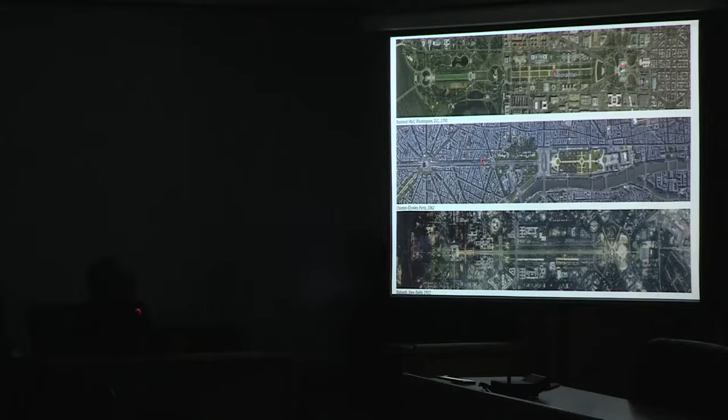Here are well-known images: that's the Washington Mall, that's the Capitol, Lincoln Memorial at the other end. Here you have the Louvre, and Arc de Triomphe at this end. At the same scale, you have India Gate here and Rashtrapati Bhavan. They were really looking at this when they did this.

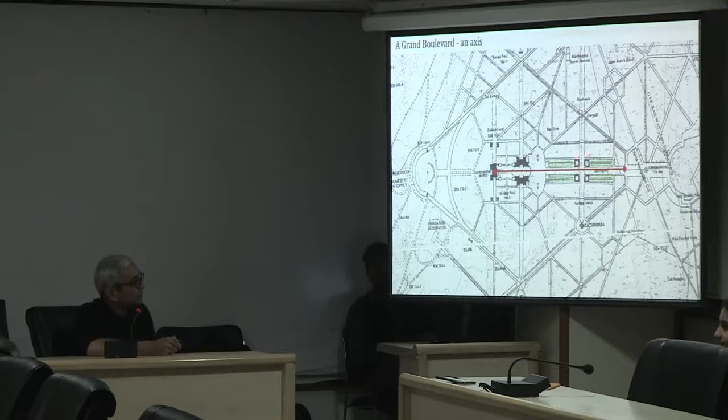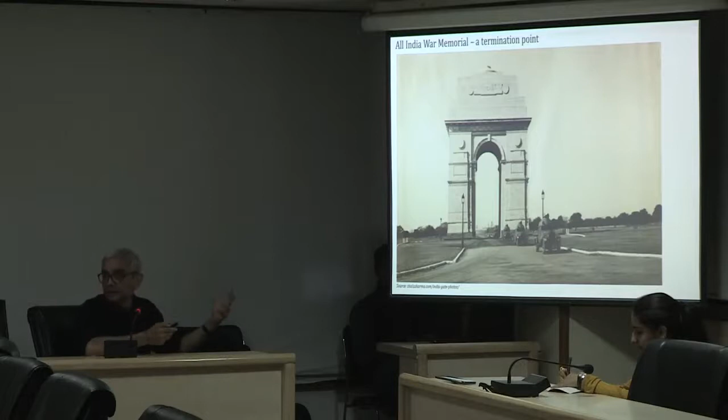You have a grand avenue of trees that sets up an axis, with a focal point at the other end - Viceroy's house, North and South Block. That's the grand axis in the middle. In the flanks, the supporting flanks, there was an idea of building administrative buildings on both sides, but nothing got settled finally and these didn't get built. At the termination of this axis, you had India Gate and the canopy. So that's your basic architectural frame.

Ever since, it has been a sort of beloved icon for us. Viceroy's house or Government House became Rashtrapati Bhavan. The statue of George V was removed from the canopy. Council House became Parliament - this was never designed to be. The North and South blocks had the most important ministries housed there. Now, the post-independence management of the Central Vista, unfortunately, was not as good as it could have been. The whole estate management was not informed by an inspiring and comprehensive architectural vision of any sort.

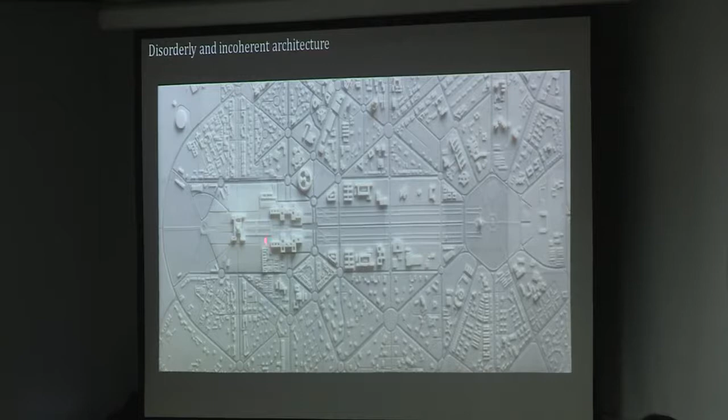The Central Vista today, I think just even the vision of it says that it's a bit disorderly - the development that came up afterwards. Of course, this is spectacular still, but this is rather disordered, incoherent. The architecture there has disparate buildings, different languages, quite incoherent here.

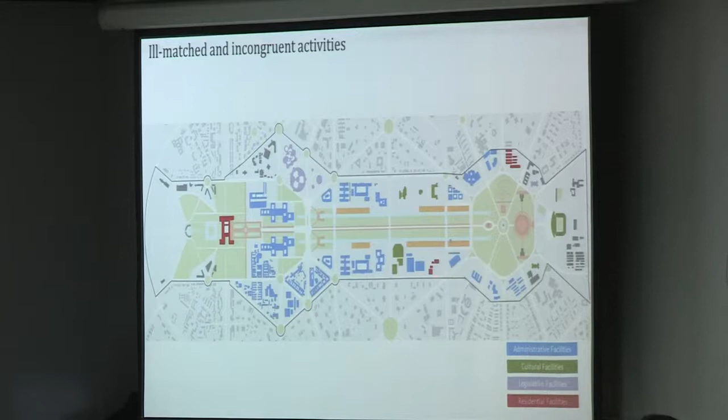The uses this place is put to - you have a lot of administrative facilities. It's a hodgepodge of uses: administrative, cultural, legislative, residential facilities, all sorts of things without some sort of order in this place.

What was meant to have all the offices of government actually has only half the ministries here. The rest are scattered all across Delhi. So you have 22 ministries scattered, or half are scattered outside. The powerful ones are here, but a lot of the others are elsewhere.

Many of the plots have rather informal development. Those old barracks have now become established offices, and there's a large amount of land - I mean, that's 20 acres, for example, a ground floor structure. Inside tall walls, but inside it's all informal and rather disordered, and a very, very poor use of land.

Even the earlier one, if you look at the buildings that were built, the footprint is small. The outside is a sea of parking. You still can't get parking here, and it's very difficult to add any new facilities. The buildings are laid out in a way that's difficult to add to.

If you look inside, many of you have been inside these offices - they are stressed, outdated, inadequate buildings, really difficult to put in new infrastructure. There used to be a way of moving through these buildings, but because of security reasons, that movement is now also cut down.

Actually, the Central Vista Avenue, as distinct from the whole Central Vista, this avenue also has been encroached upon by infrastructure and parking facilities. So at Nirman Bhavan, you go, there's a fence, there's a hole in the fence. You go through it, there's another fence behind, and there's a parking lot at the back, which is really bang on the avenue itself. So there's a bit of encroachment here also.

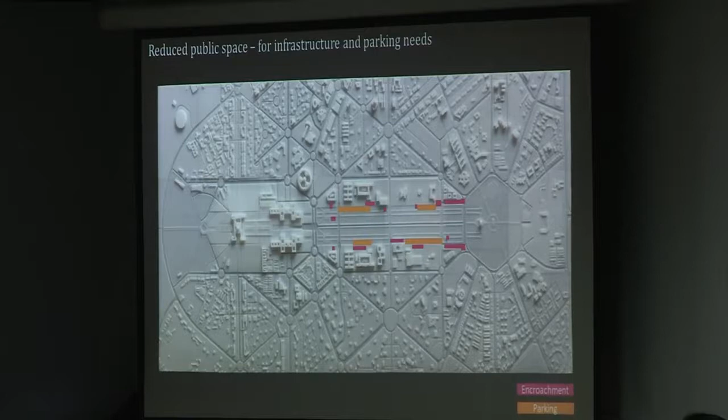The landscape is lackluster. National events take a long time to build up the whole thing and then dismantle it - it's kind of clumsy, the arrangements. It's a great civic garden for Delhi people, and it's well used, well loved, but not that comfortable to use, as it's quite clear. There's no toilets, for example.

Parking is a problem, etc. Pedestrians don't have a good time. Tourists also are drawn to the place - this is a beloved icon of India, but it's really not the best place you can be.

Nothing like inspiring capital complexes the world over. If you spend a day on the Washington Mall, you can spend it in comfort. It's a memorable experience, something that helps build the whole story of the United States, and it's a fantastic achievement there. Canberra likewise has a terrific space also, and nothing like a walk down the Champs-Élysées.

Many people, many in this room, have demanded that this Central Vista should be better administered, better developed, better maintained, and that its heritage should be protected. INTACH has said it, ISOLA has said it, IUDI has said it, individuals have done it. There have been studies done, many by people in this room, saying this has to be better managed. And nothing has been done up to now.

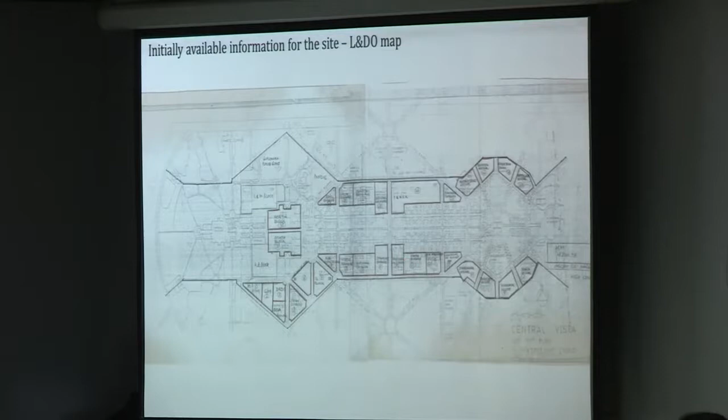And the information we got was this plotting plan, which wasn't very much used. There are these history books - there are lots of terrific books also published by Rashtrapati Bhavan, etc. And there are these historical maps which one could use.

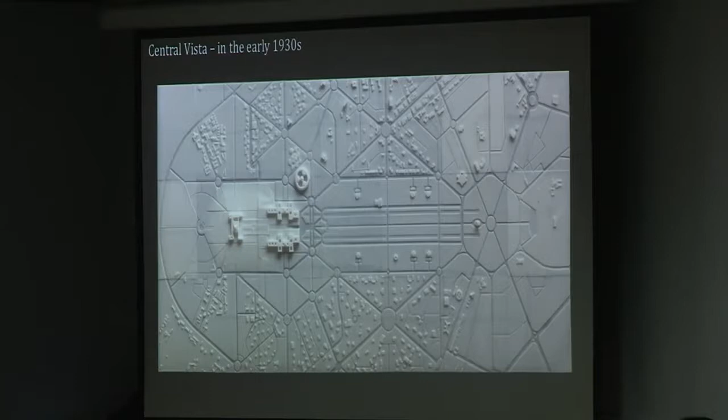And then thank God for Google, because nowadays from Google the amount of information you can actually download - frame drawings, levels, models of buildings - is immense. So we do that a lot these days, and we were able to build up this 3D printed model out of basically Google information. It's pretty accurate, and that's what we did.

We were able to build up that sort of model based on information from the Google image of that place, and develop a sketch which looked like this at that point. That's the animation many of you might have seen - that was the sketch that was there.

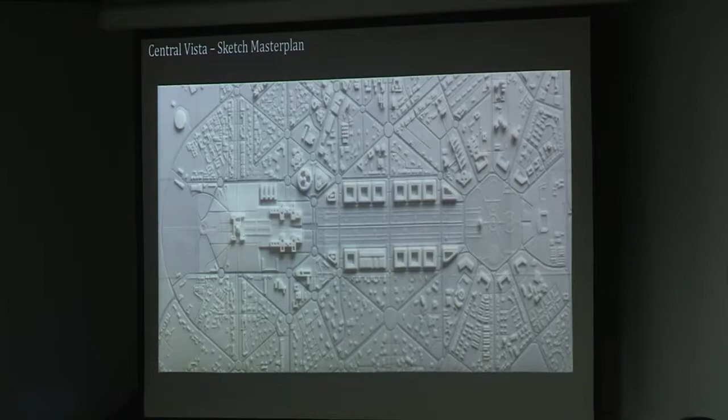Now, over the last three months, after October, the master plan has evolved considerably. As you all know, design is not a process of coming up with one idea. You come up with an idea and hope that it survives the evolution. Sometimes you have to throw out the original idea and start from scratch.

I think we didn't have to do that, but if you look at the different dates - 24th October - things start moving around as we start talking with people within government, and it keeps going. 24th December, 4th of January, and it will continue to evolve. Not in big ways now, but in smaller ways, it continues to evolve. Later on I can discuss some of the things that have happened as we've found out more information about this place, as we see more opportunities and more problems.

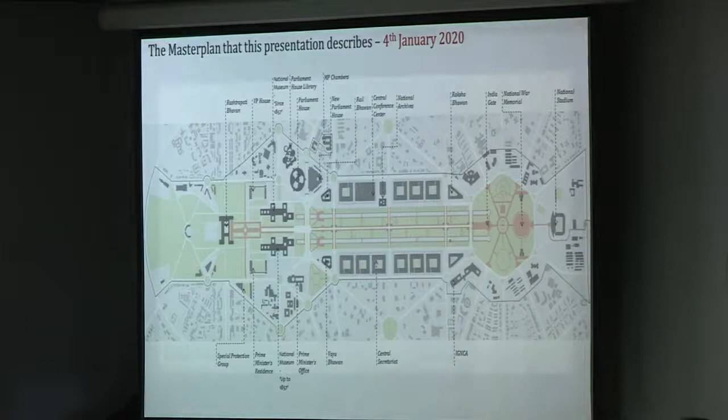So here's the 4th January plan that I'm going to talk about, and it's evolved even since then in minor ways, not huge ways. So what is this project about? It has multiple objectives - it's not one objective, it has multiple objectives.

Let me start with the first one, which is modernizing Parliament's facilities. Now you look at Parliament House - we first had to understand the existing facilities. Our original schemes said very little about what can be done.

So here's Parliament. We started with the historical drawings. We all know that Baker actually intended to make a building like this, but Lutyens almost forced him to make the round building, which we now all love and like.

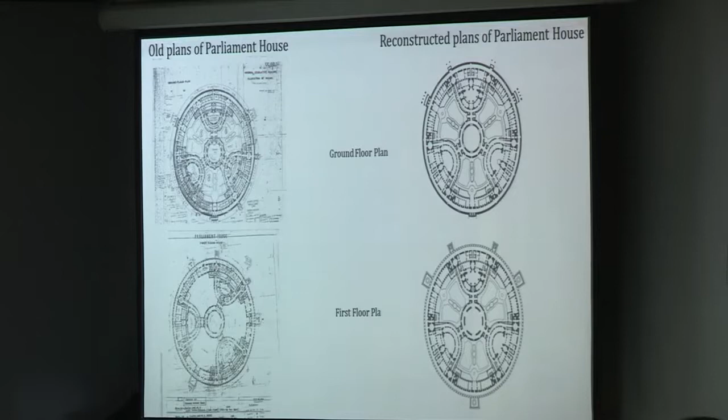And the drawings of this building, as you can imagine, are in very poor shape. They are being redrawn so that we can start using them. Elevations are the old ones like this - there are no computerized drawings or a nice, perfect portfolio available. That's developed in our office, drawn up just to appreciate and understand the architecture better. You know that we draw things to learn about them.

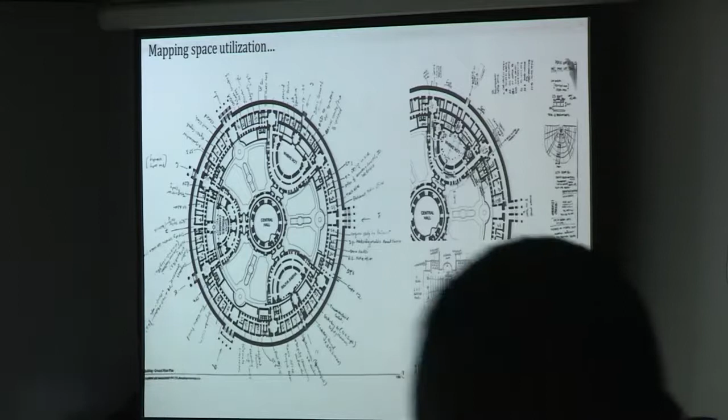We also listed all the space utilization. There is no modern estate management plan that tells us who sits where, and it's a complicated building. What are the adjacencies like? Who sits next to whom? What are the movement routes? What are the circulation routes in this building? These are very elaborate and very complicated requirements. Mind you, this building wasn't designed to be Parliament.

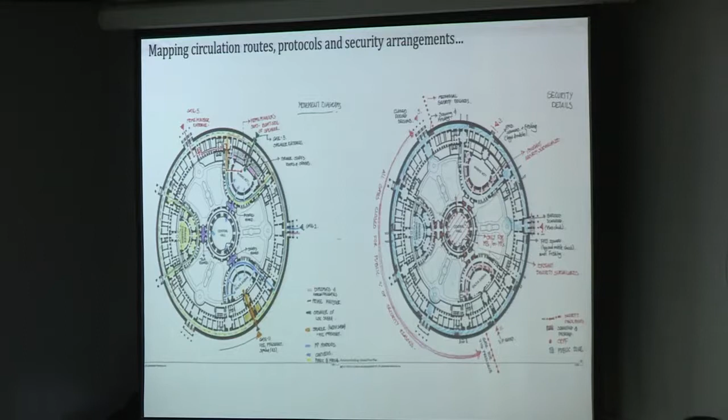Everybody has adapted to it, but now is wedded to the ways in which it is being used as the real way to organize Parliament. In any case, we need to know this as we go ahead.

We've measured the furniture because that's the key thing. You sit here and you debate. All the furniture here, different ways of arranging. What are the different facilities in this place? What are the additions and alterations to this building? There used to be natural light windows at one stage, which have been blocked, and these harsh lights have been put up instead.

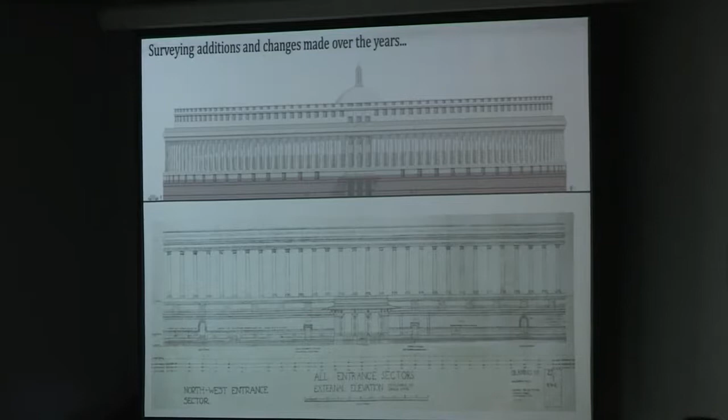If you look at the Lok Sabha Hall, these are the columns here, behind which used to be a corridor, but the expansion needs in the 50s meant the seats have been built right up to the edge. You can see in the plan, the hall is jam-packed, 552 seats. If you want to add a single seat more, it's not possible. Keep that in mind, because that's the operative reason why we need a new hall, one way or the other.

The central hall is a place where twice a year the joint session of Parliament meets, but it too doesn't have enough space, so all the aisles have chairs put in, and it's a fire hazard, a big risk. When Parliament expands, there definitely will be no seat for both chambers to meet together.

This hall is also used as a lounge, because there is nothing called a lounge there. So it becomes a place where they have chai, coffee. There's a chai coffee setup just in this corridor as you enter, and you find this is a place where ex-parliamentarians hang out, and that's where they meet everybody and talk. Very important business happens in these deliberations that our country functions on, but nonetheless it happens in a hall with furniture that's not meant to be a lounge.

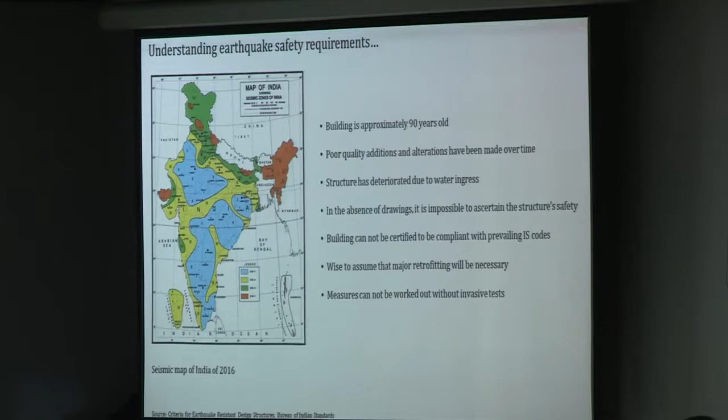So, in conclusion, it's a great symbol of our vibrant democracy, but if we want to expand seats—and they need to go up to 900 from 552, not 1 or 2 or 10 or 20 or 30, the projections are 900, I'll explain why—infrastructure modernization has to be done, and if structural safety concerns are there, we have to create a new facility with a larger hall, basically. The larger hall is the operative thing. Then the old building can be retrofitted, and we've come to the conclusion that the two buildings can work together, not as separate buildings, but some of the old facilities continue to remain in use. So perhaps the ensemble together can work, and that becomes the parliament rather than a new parliament and an old one. It's just an extension, and the two work together.

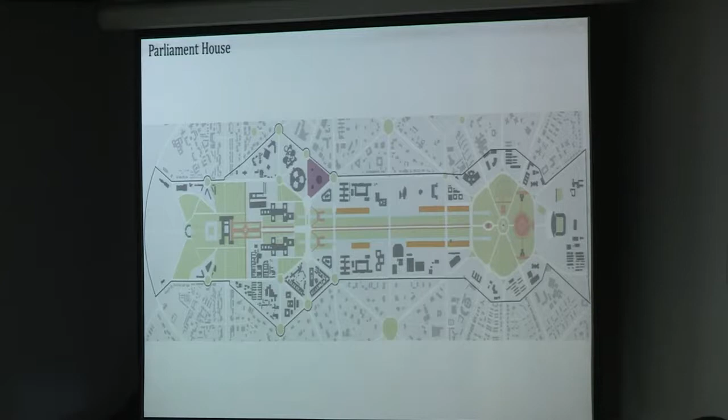It's designated legally as a garden plot, but there's nothing garden about it in reality at this point in time. This is where a new facility can be put up, and this triangular building is what we are developing the design for. So the architecture of this facility is also in progress.

It's a complex building. Security, Rajya Sabha, Lok Sabha, the Ministry of Parliamentary Affairs, all of them have offices there. The catering, the cleaning, there's a whole host of things. You can imagine what it's like. So the plans here are daily evolving as we have meetings with the staff and figure out how to get this going.

Of course, the parliament will continue to be in this diamond. Presently, you enter from here and here, and now there will be perhaps one more entry from this point, and the two would work together. I'll go fast over this.

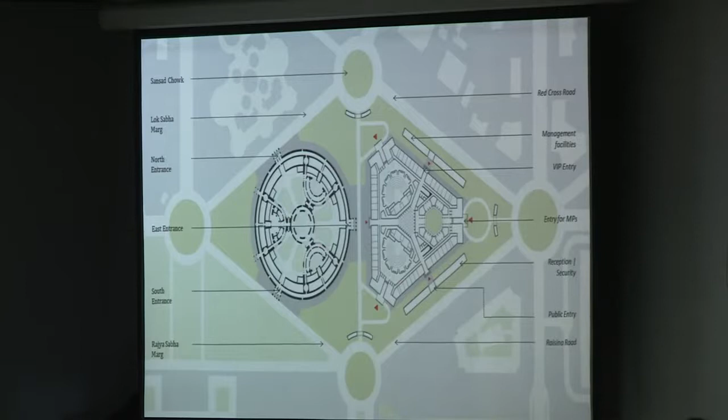If you look at the old building, what you have here is a corridor all around. Then you have offices running all around here. Then you have chamber for Rajya Sabha. There's a corridor running like that. Chamber for Lok Sabha, that's the lounge of the Lok Sabha, this round thing here. Lounge of the Rajya Sabha. That's the central hall, that's the library, and these are the open to sky courts in the middle here.

So the new building, at the same scale, you have offices all around. Offices here will continue to be used. There's no question, we need more offices. This is the Lok Sabha hall, Rajya Sabha hall, and an open to sky courtyard with lounges and dining facilities on top. If you look at the ground floor plan, still getting there, but different entries, 6 entries, ceremonial entries.

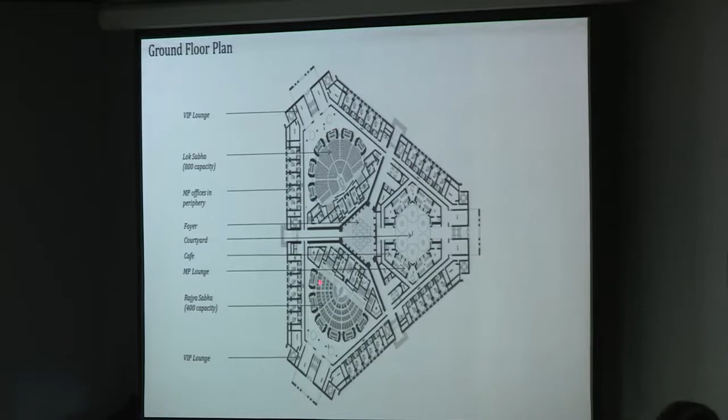I'm not going to get into details of what this is about. If you look at that, that's the Lok Sabha hall, with the public seating galleries etc., and offices on all sides, and a foyer in the middle.

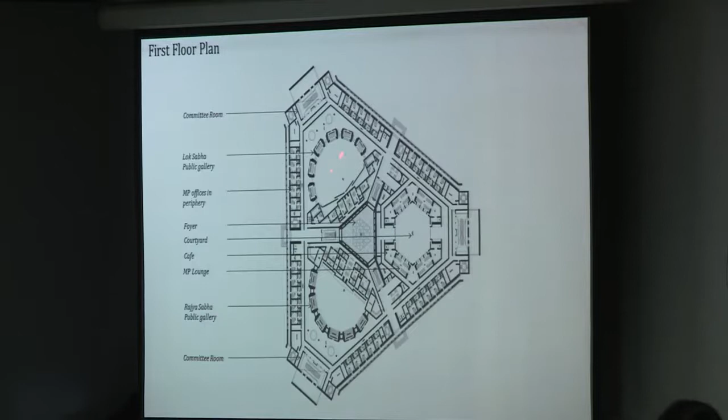And the top floor, of course, has this double height or triple height, and so they continue to have offices, and that's the triple height on top. So that's still evolving. Today there was a meeting for security, and I'm sure something's going to have to change.

You all know one tries to get this very rigorous geometry, and we start with a 5-meter grid that didn't work, then 5.5 and 3.5, and it seems like 3.65 is going to work, but that's the grid. My guys tell me that we're going to have to go back to 3.6, so perhaps that.

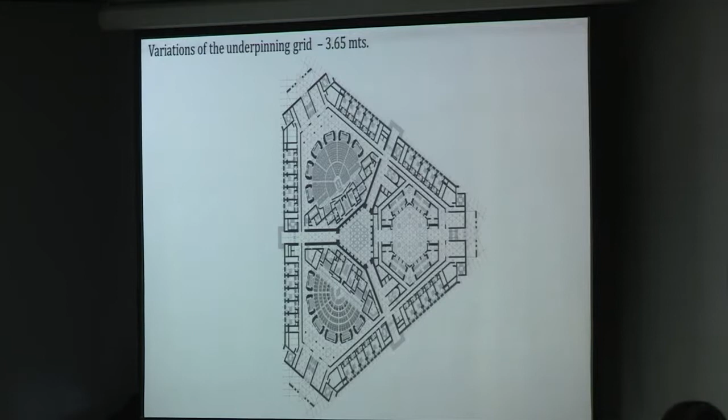Sections, elevations being worked out right now. The key point is that we are constantly making references to the old parliament. The two are going to sit next to each other, and from a distance it should appear as if the two are completely related to each other.

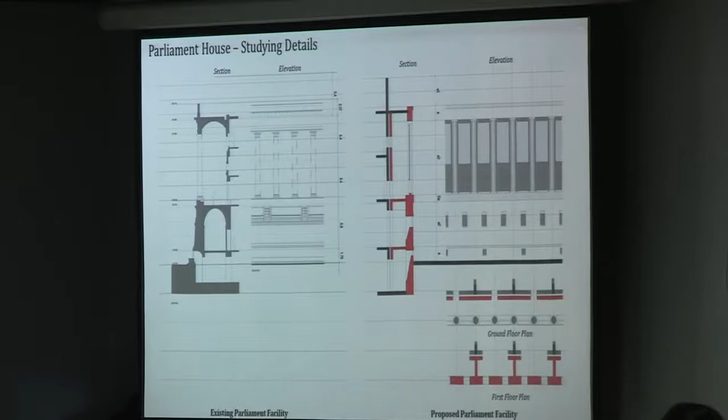So if that's the section of the old parliament, that's the section of the new building here, they don't have to be exactly the same. They're not trying to mimic it, but it's tone, it's similar language. The two sit together right next to each other, and that's just a quick 3D of it.

The seating is a big deal here. We studied world over different types of seating arrangements. I'm going to continue with the horseshoe-shaped seating arrangement that we have. It's worked well for us, and everybody agrees that it does good.

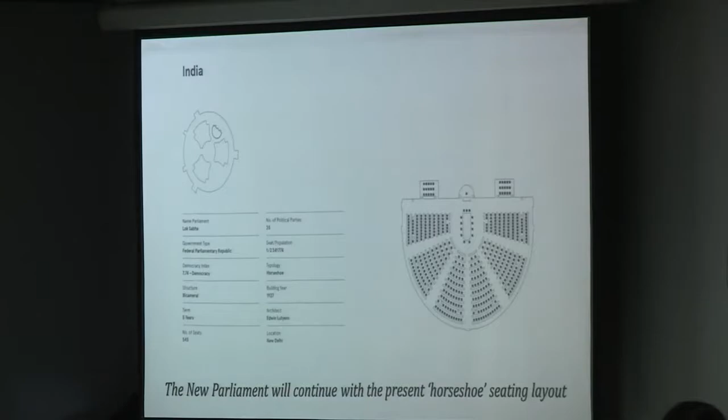That's a scale comparison - the red is the present hall, and the new one is 900 seating. 900 seating because, when we started off, each MP represented 15 lakh people of India. Today it's something up to 20 or 23. By the time the freeze on expansion goes in 2026, we should be around 25 lakhs per MP. If we stay the same size, when India becomes 1.7 billion, it's going to be a real problem, but it's going to have to be expanded.

There's a terrific paper by a guy called Milan Vaishnav on the different dimensions to this. 850 seems to be the projection when India's population peaks and then starts dropping. 850 is, so 900 is what we have been told we have to hit.

We are not going to do a joint session hall, and the Lok Sabha hall is supposed to double up as the joint session. So at some point it's also going to have to seat 1,300 people in one big hall. How do we do it? Well, the seating furniture arrangement is very important.

Seating type, whether the choices are bench, swivel chair, sofa, bench without armrest, with armrest, seat size - the present mean is 450 by 450 dimension, or should we make it bigger? Desk - presently only the front two rows have desks in front. Everybody complains saying, there's no place to keep anything.

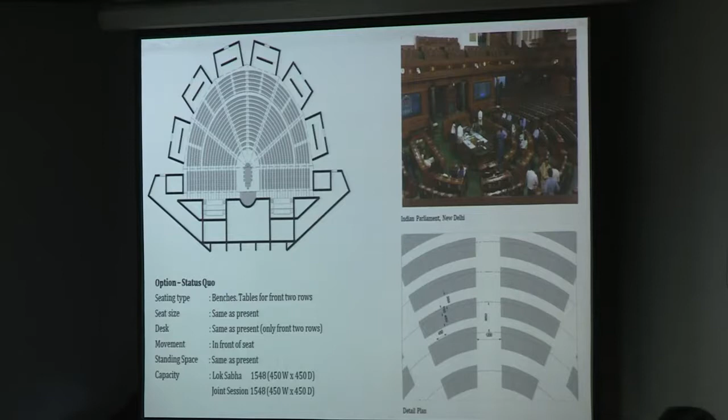What we are going to go for, to cut a long story short, is to have benches for 2 people so that people can come on both sides and sit down, and you don't need to walk in front of people. So these sort of 2-people benches, but wide enough to hold 3 people - about 1,300 or 1,350 length of bench. Generous seating when you have 2 people, but 3 people can sit, and even then it will be better.

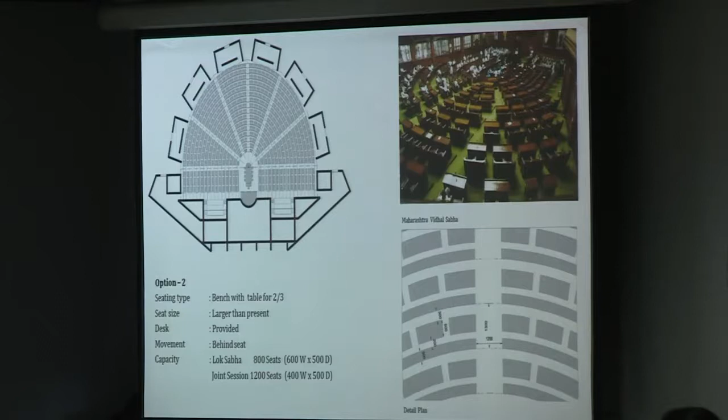And that becomes the joint session hall. So that's the idea in this place. There are other issues of whether we can have radial aisles in the Rajya Sabha - I'm not getting into that.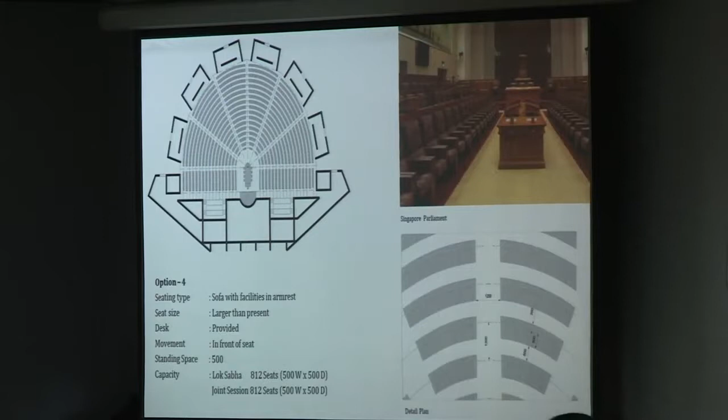We threw out these options of sofas like the Singapore Parliament and the German Parliament. We threw those out. Mock-ups of furniture like this, because every centimeter counts in this. That's the kind of design that is being done.

Technology, very important. Acoustics, not just to remove echoes, but perhaps to do it much better. Good acoustics can set the mood in a hall. Philharmonics do that. We found a good company here, Veneklasen, that is a San Diego-based company full of physicists, and they do acoustics, and they have a Gurgaon office also.

Two years ago they set up - they've done the German Parliament. I think we are in good hands with them when we work with them, that they're asking the right questions. So lots of acoustic design that is informed by the best practices world over. Lots of public address translation system issues here.

Lots of technology for this. Once again, the same firm is helping us do that. Lots of digital information technology, voting systems, etc. All of this is technology, but all has to be integrated well. More importantly, it has to be upgradable, because this will all become redundant in 10 years again as technology improves. So let's see where we go with that.

This building has to celebrate our nation and our democracy, and this is how it's lit up, and that's our favorite sort of symbol, and perhaps someday there'll be something like this and a beam of light.

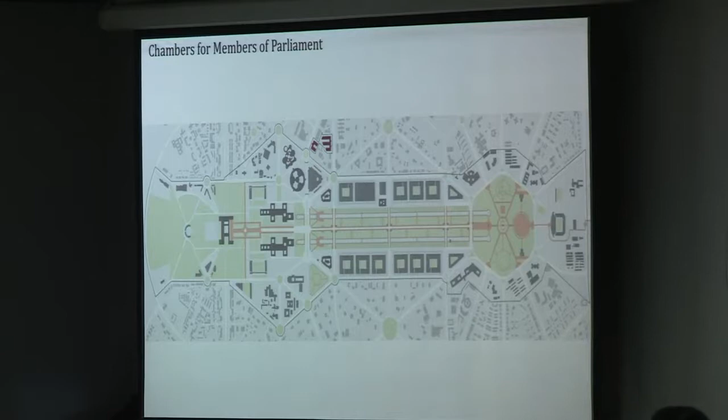even underground access possible here. We haven't worked on that. That's still till Transport Bhavan moves, we have time lag on that, and so it's just a basic idea, and feasibility has been checked.

Now the second big chunk of this project is the Central Secretariat, and the Central Secretariat is driven by the idea of improving productivity and efficiency of administration here. This is Central Secretariat. We're talking about this central space in the middle, the two flanks, the administrative buildings. We know as architects and management experts know that the productivity of organizations and the efficiency and sustainability of organizations is hugely affected by how the spaces are designed.

So every year probably we get new books on how office spaces ought to be designed and how the culture of work can be. So we hear about Google doing a new type of office, and this is a major place of innovation. Productivity in organization, how much gets done for every hour worked, is dependent on cooperation amongst members. This is one of the key things - how people cooperate, and that is affected by proximity and clustering, which is why you have cities with higher productivity.

It's affected by ease of formal and informal interaction and the time spent getting to work. These are the key elements, and these are the drivers for productivity.

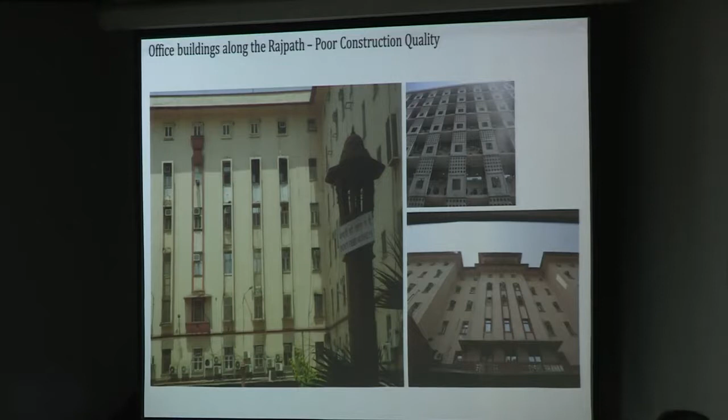If you look at the present cluster of buildings, about 25,000 people work in these facilities here. And you look at the buildings, they are now not well maintained over a period of time, poor quality of construction now. The service integration is awful, very costly air conditioning, the inefficient use of land, I already said.

Equipment inside is like, everybody has put in new security equipment, etc., doesn't work. The architecture of the place is incoherent in many ways.

Improving productivity and efficiency by building a central secretariat is one of the key aspects of this project. So here, if you want to increase efficiency, you want to increase productivity, you want to go from the present scatter to a higher productivity place, at least infrastructure that promotes higher productivity and higher efficiency.

And as we all know as architects, everything moves you up this. First, simple things you can do is facilities management, share offices. You don't need new buildings for that. Furniture layout, etc., promotes certain styles of functioning.

Open plan offices, for example, will do something different. Services, you know this stuff. Building skins, new buildings, location, all of this. Each one of them costlier to do, but well worth it in pushing up levels of productivity.

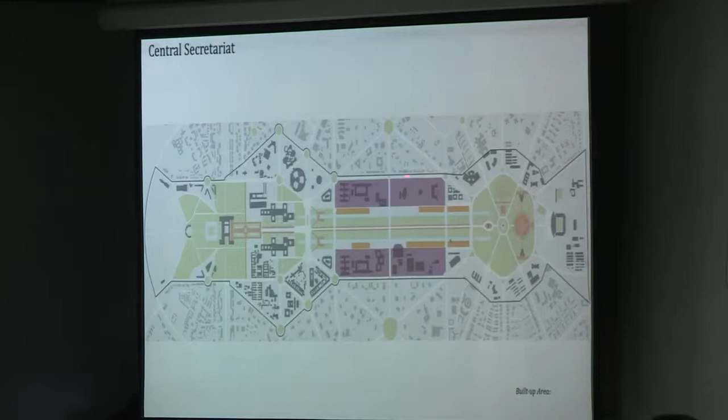So these 4 plots are what we are talking about. This is where the Central Secretariat is proposed. It has 3 components: 10 office buildings, modular, the central conferencing facility, and the archives building here.

So archives, conferencing, and office buildings - that comprises it, and here you have the 10 buildings, the central conferencing facility, and the archives. That's your Central Secretariat as presently envisaged.

Office buildings - these are 10 buildings in 4 plots. They bring all the ministries into one place. They are sized to bring everybody into one place. It's a transit-oriented development that a lot of us talk about.

This is two metro lines passing through here. The way to improve public transport is last mile connectivity, as they say, or the ease of getting to the metro.

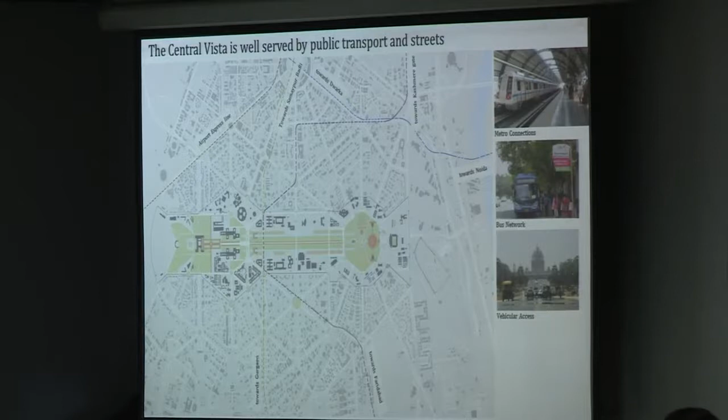I always, when I land at T3, take the metro and come into town. But if I land at T1, I call my car there, because just getting to the metro is too much of a problem. So to ease that here, at the underground level, what we are exploring is the possibility

of connecting, giving a sort of direct access to a people mover of this sort, a shuttle that moves underground, also moving inside the government compound in a sense, and it takes you to the basement of your buildings.

Many of you have been to Singapore and Hong Kong and been to the airport there. The terminal to terminal connectivity is done in this way, so that you come down escalators, get into something, get out the other side. And that's what we are attempting here, not fully worked out.

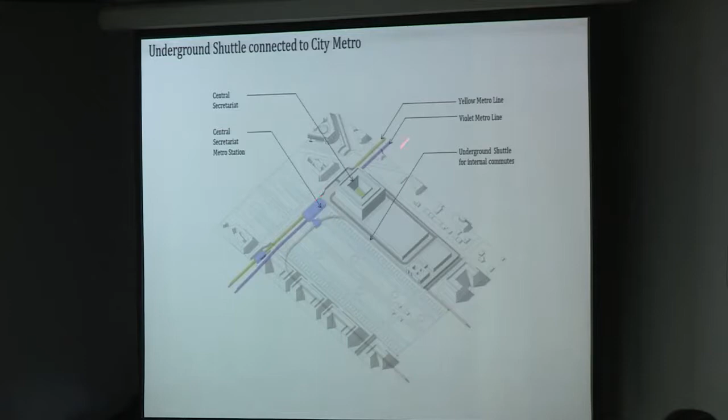More on it as it gets worked out. And that's like the underground. We're still getting the drawings of the metro together, etc. It's a complicated thing, and the transport engineers are working on it.

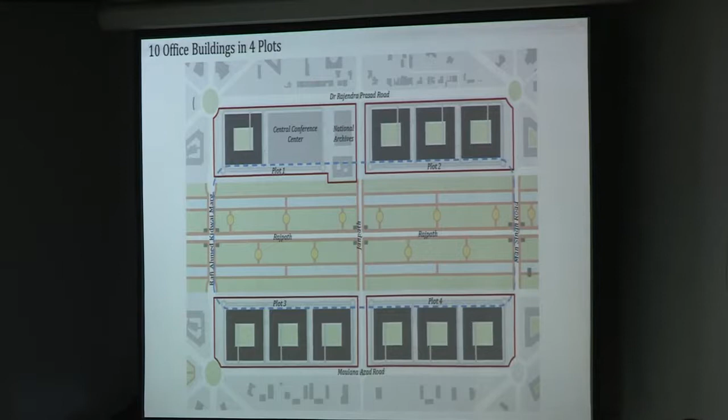In addition to this, of course, there's parking for a portion of the people who will work here, and there are buses running, coming up to here, and maybe an overground shuttle. So that's where your underground shuttle will run.

Now we look at these buildings. Mark my words: everything that is to be built is inside presently fenced compounds. There's nothing to be built outside of presently fenced compounds. There never was a plan to build anything outside fenced compounds, so there's no appropriation of public space. In fact, in some places the fences are being brought in, creating an expansion of public space. This will remain a secure compound.

Let me say something about this quickly. Security becomes a big problem when VIPs have to mingle with the public, and then the public bears the brunt of that security. If VIPs are put away in secure compounds or given separate access, the public is free to move with less disruption. That's the philosophy we are going by. That's how, for example, at the US Capitol Complex you can walk into places, because everyone important comes through underground passages. They are not brought anywhere near the building by car outside, except for ceremonial occasions. That's the philosophy.

So this is presently fenced, only there are vertical divisions here. Those divisions will be removed. It's the same fence, and yes, the fence is porous—not a tall wall like some others—but nonetheless secure.

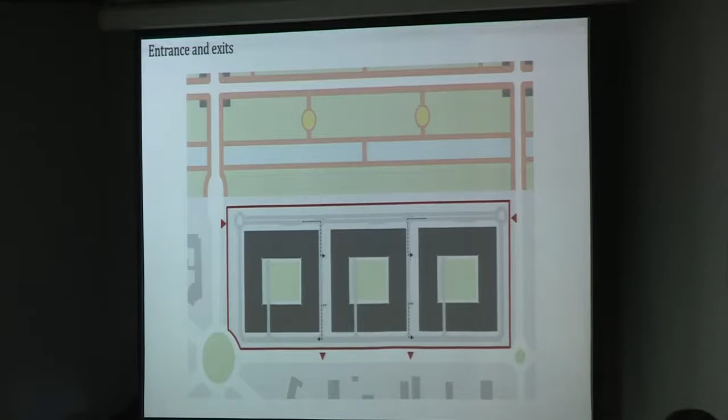There is zero entrance going to be given from the Rajpath side onto these buildings. Entrances remain from Maulana Azad Road, for example, here, or from this side, not from Rajpath side. There's a loop road inside, entrances here, exits here—all this being worked out with number of cars, crowd management, and security arrangements.

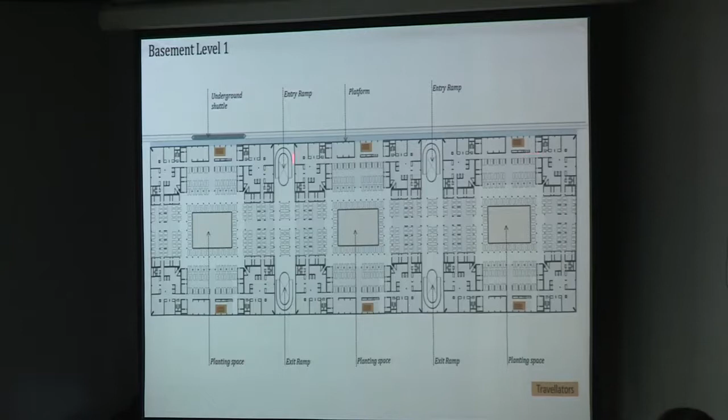Basement access and fire tender access into these donut-shaped buildings. A huge combined basement gives much economies of scale. You can see three basements here—one donut-shaped building, another, and the third. These are the entrance points, the access ramps. The blue is all a sea of parking, and you have amenities, infrastructure, and vertical movement up here.

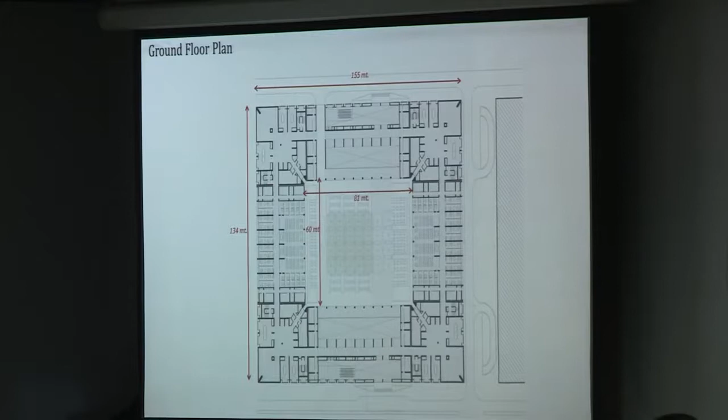You can see what's planned here—this is the underground shuttle that brings you here, and escalators that take you to the arrival hall. This is all underground. Looking at the building, one singular building is 155 meters by 134 meters, with an 81 by 60 courtyard in the middle. The courtyard is landscaped—think habitat center with larger courtyards.

On the ground floor, the main entrance is from the Rajpath side, since that's the more important side, but you don't bring your car in from there. The car comes through the loop road to reach that place—so no cars from the Rajpath side. There is also a secondary entrance from the other side.

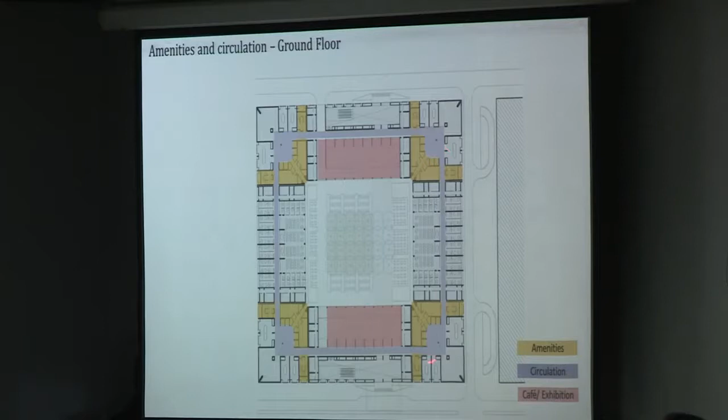On the ground floor you get a big exhibition hall. It's a rational, simple, efficient plan, difficult to get lost in—unlike present-day government buildings, which are mazes where you get lost. There are amenities here, circulation all around, a cafe on the ground floor. On the typical floor, without getting into detail, these are all the workspaces, infrastructure, amenities, and circulation—a very simple arrangement.

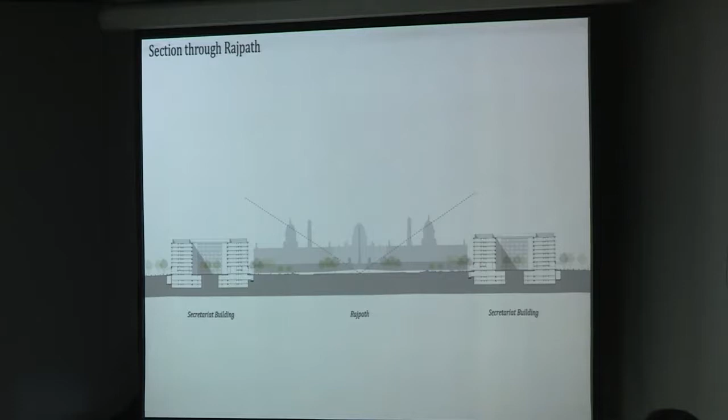That's where the buildings would sit, that's where the basements are. If I take a section in the other direction, that's the basement, these are the other buildings. The height of the buildings is below the top of India Gate, at 42 meters, so it's below. We are working on the possibility of lowering it further, but the highest it will go is this, and that's what we are trying to design for at this point.

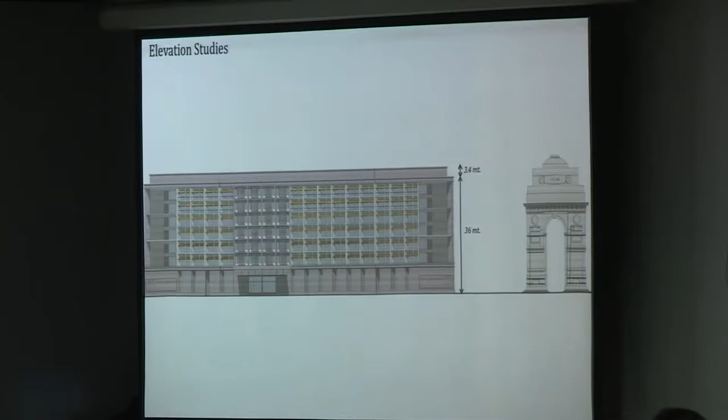Many elevation studies are going on, related to energy efficiency and use of the buildings inside—I won't get into details. That's the building: stone on the outside, a lot of glass on the inside to capture as much light as we can. But when the trees grow, this just becomes a landscape plaza. Now that's a very early drawing.

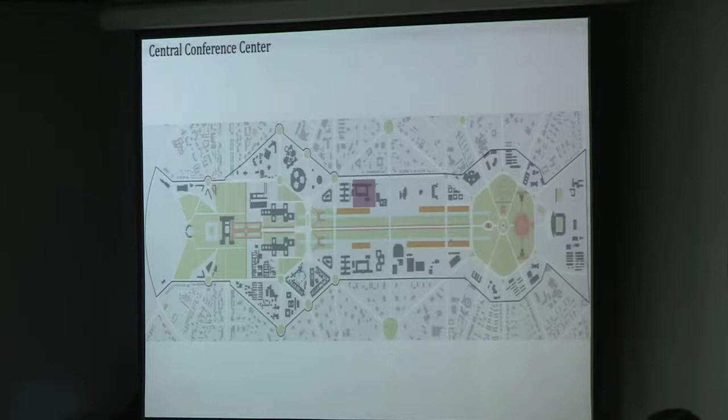I was debating whether to put it or not, but you know that's early stage. The Central Conference Center here, that's your Vigyan Bhavan type of facility, out here next to the archives. Nothing done on that because that's still, for me, a little bit further down the road.

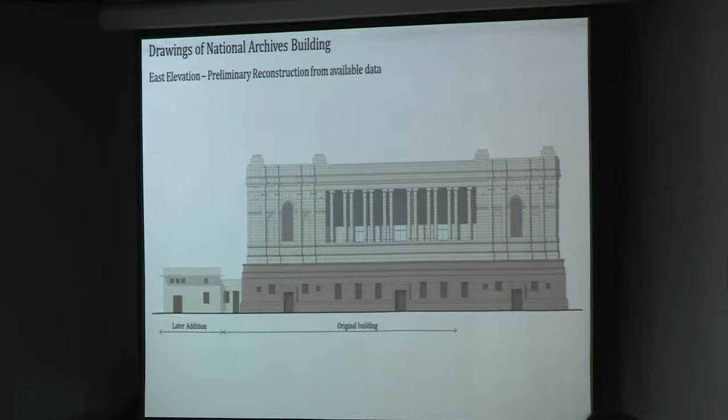The archives building, all of us know, is out here, and that's what is planned here. Let me explain: that's the old building, with lovely old drawings available of it. There are ugly additions like this security barracks attached, and a new addition at the back that's not serving the archives very well just now. That's what the archives buildings look like, could do with a little bit of retrofitting and cleaning up. That's the new facility right next to it, which really isn't serving the purpose of the archives well.

They need a lot. They do heroic work inside here. I was just stunned - if somebody hasn't seen it, you should see it. They're all bundled up in their jackets, dealing with moldy walls, working with manuscripts that are 300 and 400 years old. Heroic work. They deserve better facilities.

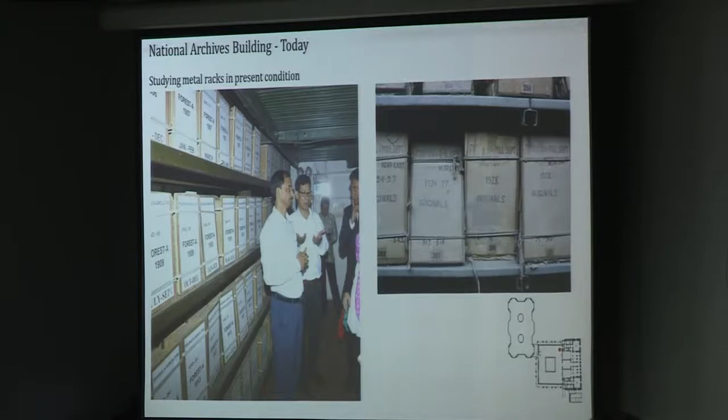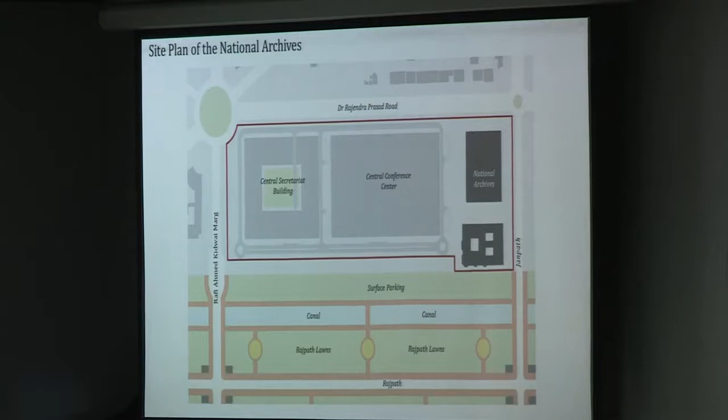That's the public face, the old building - terrific, we'll restore and keep it as the public face. That's what the archives will continue to be. This is the actual original. This was a poor addition, but from older times, and the halls inside are still quite nice. The joint here is very poor if one looks at it, but by moving this building and putting a new facility here - which is modern, with parking below etc. - we will do much better and create a modern office infrastructure and labs for the archives.

So I'm done with the Secretariat. Now I'll move faster.

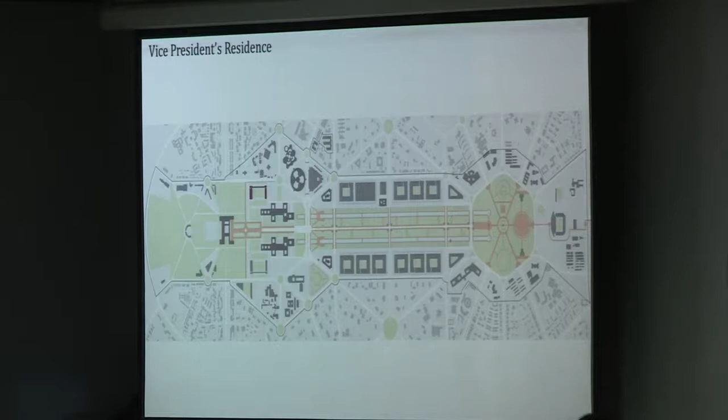Adequate facilities for Vice President and Prime Minister. The Vice President presently is in this bungalow here on Central Vista. The location really isn't appropriate for the place, security-wise and otherwise, symbolically also, and the facilities inside are very poor if you've actually seen them. Many are temporary - barracks for security staff, built temporary because you're not allowed to build anything here. North of North Block are hutments, old barracks converted into offices, which will be moved, and the 10-acre plot becomes the Vice President's residence in this place.

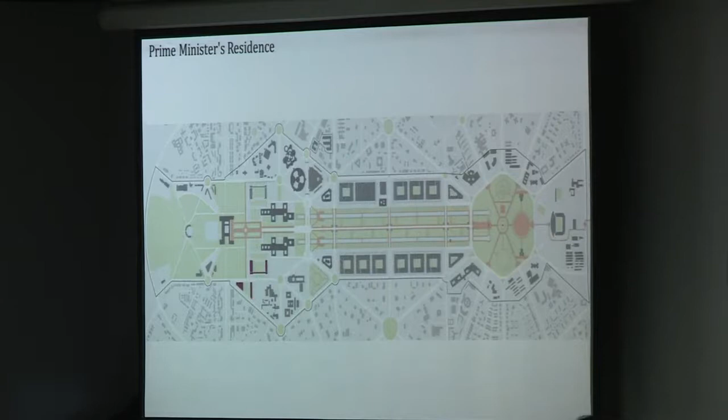Facilities for Prime Minister: the present residence is at 7 LKM, and here you have barracks which are also to be moved to create space for the Prime Minister's residence and the SPG compound. So disruptive travel gets reduced, further reduced because the barracks here are to be removed, and this plot houses the new PMO.

The present PMO is in South Block, the last far end of it. That comes to this place here, down below, lower than the buildings here. We don't know much more about this except that the building will be here and there'll be a garden here. It's presently a fenced compound used by defense for barracks. We don't know much more about this because that too happens a little further down the line. We know the location, we know feasibility is being checked.

Now, something the landscape people are interested in, but we've done very little work on at this point - the Central Vista Avenue, as we're calling it, distinct from Central Vista as a whole. The avenue is this space here in the middle, so presently, essentially what we are doing is studying it.

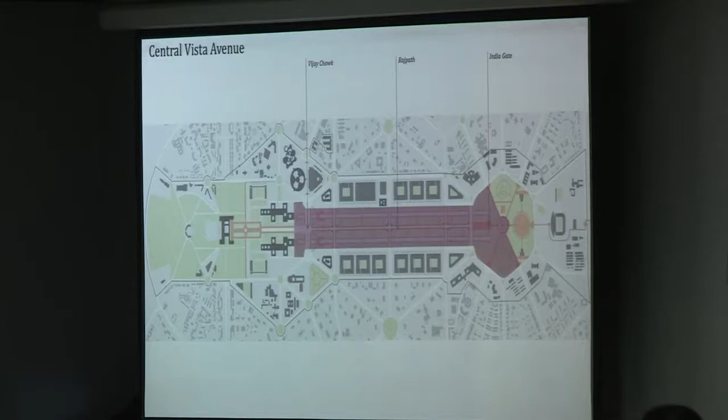Once again, for us this is a phasing issue - the work cannot start for a while, not until later, about a year down the line. So we're not working on it immediately, and I hope we'll have an opportunity to discuss the designs in much more depth when something is ready.

But presently, we know clearly that the attitude is set. Presently you have haphazard parking, tired landscape, poor furniture, ad hoc vending, lacking facilities for events and activities, poor quality lighting, inadequate signage, poorly maintained water features. These are the standard laundry list of problems with a lot of public spaces.

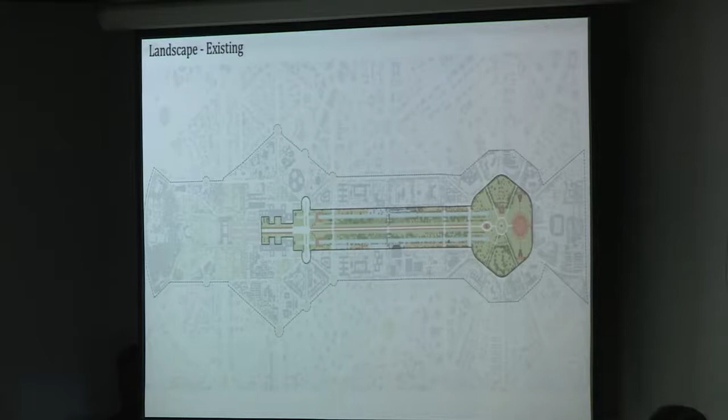Maybe the parking can be better organized, maybe the pathways and footpaths can be done better, maybe the signage can be done better, it's already being done better, the seating can be better, the planned vending areas can be better organized. Same uses, exactly the same uses, it's still a civic garden, it's to be maintained as a civic garden, to be maintained as a great tourist attraction.

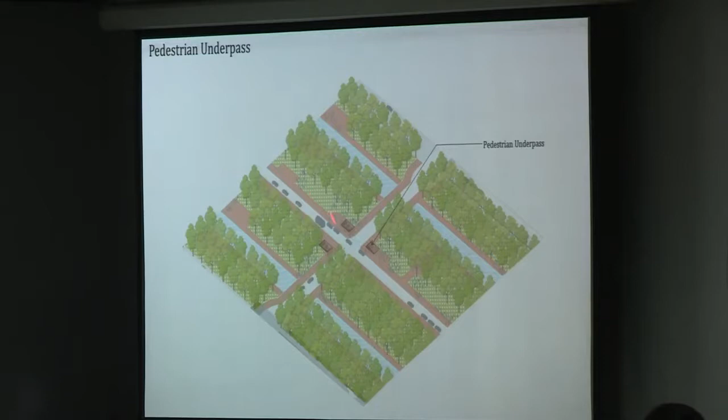Perhaps build some pedestrian underpasses so that the traffic can move freely and the pedestrians can go below, and the traffic also gets a chance to glance at the great vista that we have.

Maybe the space in front of India Gate is paved rather than have tarmac of this sort. So simple, improve the quality of lighting. We're already doing this all across the country. People are doing better jobs, and facilities for events.

So I stop at just talking to you about the attitude. Nothing to be changed except everything to be upgraded. People keep asking me, is the experience going to change? It's not going to change except if you say that it feels better to walk on paving, that's better. Well designed signage, everything is better.

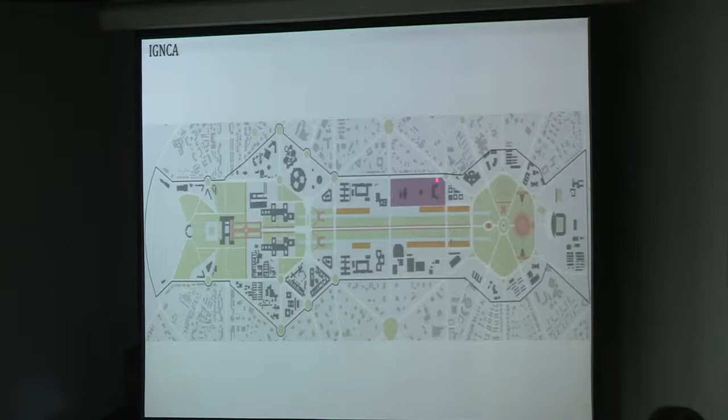Let me come to the fifth point, which is strengthening cultural recreational facilities in the Central Vista. First of all, IGNCA, which occupies this 24-acre plot with a few buildings, just 300 people working in there. It is to be relocated in this 15-acre plot, which is the Jamnagar House plot, a government compound just now. It is not accessible to the public just now.

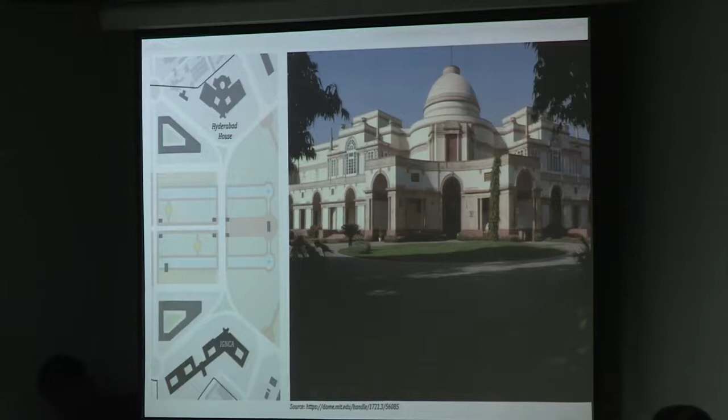But to make a lot more publicly accessible facility is what the IGNCA people want. It's right across from Hyderabad House, so in some way it's going to have to mirror the architecture. One portion of the building at least will mirror the architecture in some ways, and the other end of it could be the other new facilities that are needed. The present facilities also do not serve them very well, they need a lot more facilities than what they have. So that's being worked upon, the program is being worked upon, and that's the site that's being used.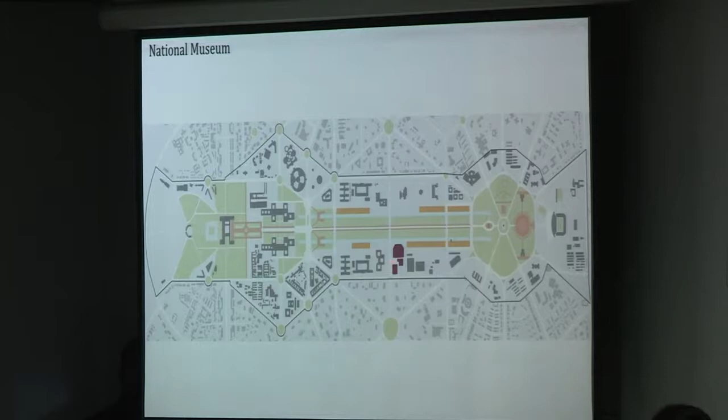National Museum, which is at present out here, the idea is to move the National Museum to North Block and South Block. So these become the grand national museums of the country, and perhaps the South Block has all the artifacts and things of India up to 1857, and perhaps the North Block has India after 1857. The idea is to make a more programmable museum of the kind that you see world over.

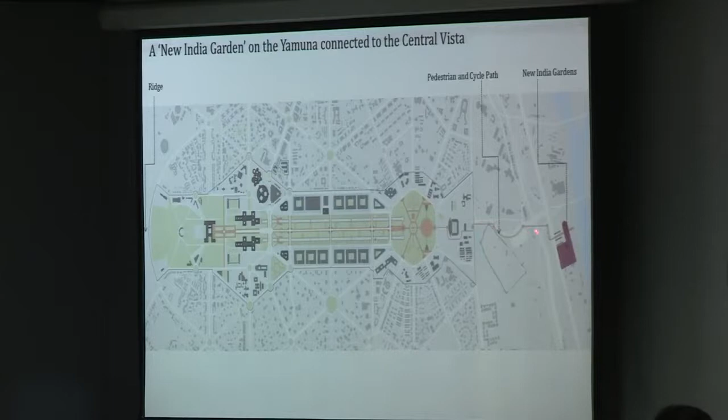New India Gardens, the idea of extending the axis up to the river has long been talked about, and originally also that everything is built up in between. So the access route from here can be worked out better, the pathway can be better. Perhaps some grade separation at this place here where you have a major highway.

But make it easy for people to access here, go to Purana Qila, come here, go to the park, and on the Yamuna itself create a small park that is the New India Garden, commemorating the 75th year of Indian independence, with an installation at this place to be designed through a nationwide competition.

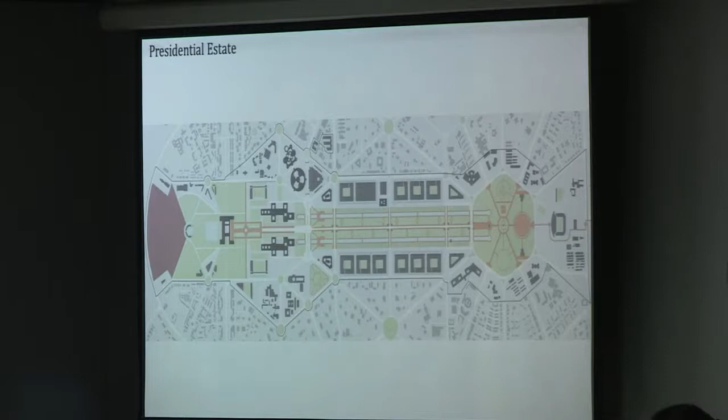At the rear end, on the other side, that's the western end of the axis. The idea is the area at the back of Rashtrapati Bhavan looks like this at present. That's Mother Teresa Crescent here, and that's Rashtrapati Bhavan here. This is the line of the estate, 392 acres. This is all the facilities inside Rashtrapati Bhavan for all the people who live and work there.

About 1,200 quarters in here, that's the secretary's residence, that's guest houses, that's a football club for all the people who are here.

Here's a place, a community guard's community place for their functions, etc. But this land at the back has vegetable gardens and basically a babool forest at this place.

So the idea is, could around 48-acre area be carved out? Some of the facilities here, like the nursery, could be moved to this little patch, and could this be turned into a publicly accessible

biodiversity arboretum with an entry from the rear? So it would have greenhouses, forested essentially, but with greenhouses here. The idea, just a basic sketch, is to have greenhouses with different phytogeographical zones of India, housing all the endangered species of India in one place.

And so what looks like this at present and is accessible only once a year for the Mughal gardens, when the public is allowed in, becomes a permanently accessible park here at the back.

So two big gestures: expand public access into North and South Block, turning them into museums—what are essentially government secure areas—turned over to the people. What's at the back here, also not accessible, essentially a vegetable garden, turned over to the people.

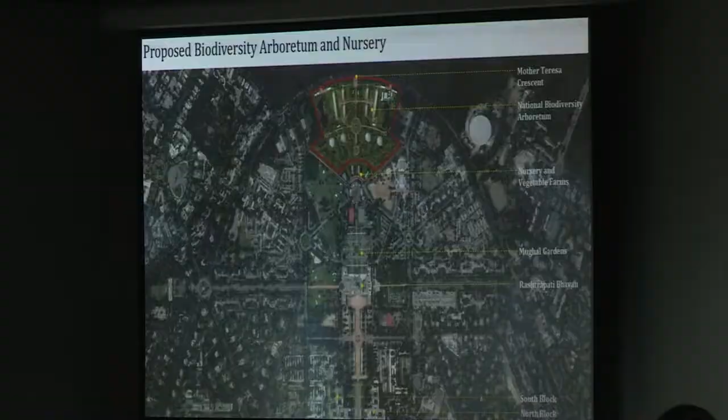Commemorate 75 years of India's independence by extending the vista from here to here, notionally, not literally, since this is already built, and expanding public space.

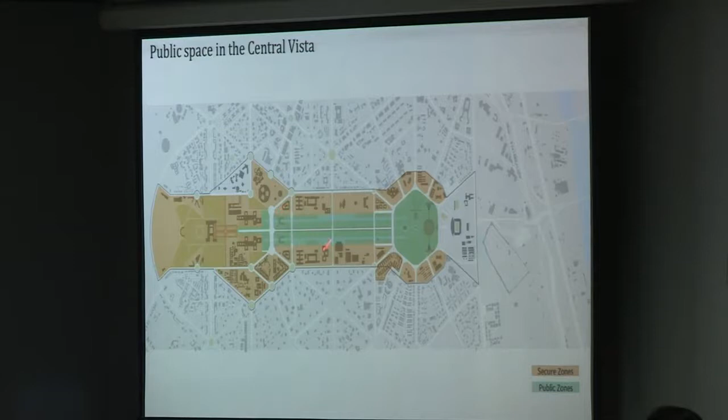So presently the public space is here. These are all fenced compounds, all of them, and really very difficult. This is the public area.

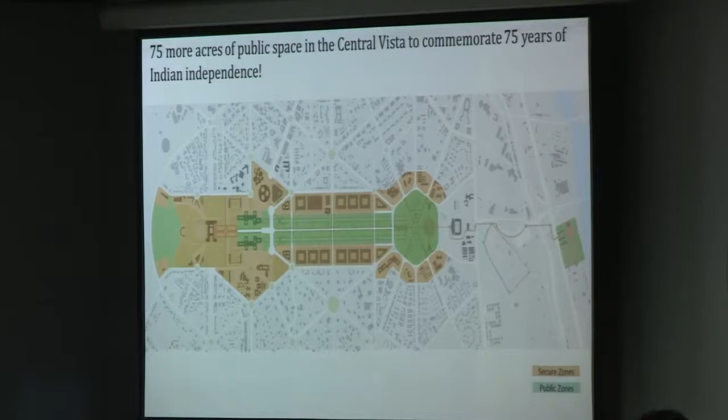Expand it by adding 27 acres on Raisina Hill, and add 48 acres at the back, 75 acres turned over to the public to commemorate 75 years of India's independence. So that's kind of the big move.

Perhaps a transit shuttle that takes you around, up and down, improving the facilities so that people can come here and experience this.

In some sense, reimagining the vista: this represents the nation, the geography through the biodiversity arboretum, the people, the president, the history through the big museums. Then you have the legislature and executive administration in the middle, culture at this end with NGMA, IGNCA, National War Museum, etc., and leisure, recreation at the far end.

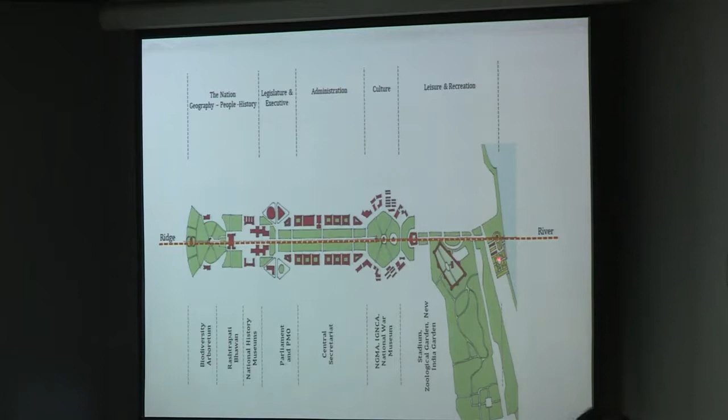So in some sense, a new way. To sum up, two meta objectives: can this be done fast? Does it have to be done like our traditional infrastructure projects? Can we build our capacity and confidence to proficiently do these projects fast—that's one of the ambitions.

Very ambitious, difficult. We all know we are in a business entirely dependent on all the people involved at the top cooperating and working towards one end. India doesn't do that very well. Cooperation is something we are very, very poor about.

And second, another meta objective: many years of neglect in our cities, all our cities, not just one—we are convinced nothing can be done about it. Can we do something about it, and show it through a demonstration project of this sort? I'll stop with that. Thank you very much.

Lots of people are involved in this project. I get the privilege of talking about it. I also take responsibility for my team, but here you have the ministry and everybody working hard—the CPWD team, the DG, and everybody working hard. You have my team, people from my office working on it. We have a whole host of consultants because we are only architects, urban planners and urban designers, and we have some advisors working on it. This list is bound to grow as we go along. I've already talked with Sujata about how some institutions get involved, and we start working together to make this happen. So with that, let me stop. Thank you very much for listening to me.

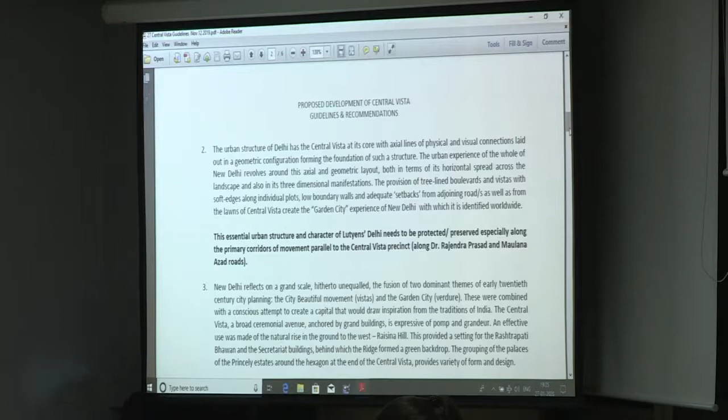The proposed construction should not overpower the grandeur of the Rashtrapati Bhavan and North-South block ensemble. The area of the North and South blocks, in proximity to this ensemble as well as around the Parliament building, needs stringent urban design guidelines for any addition or alteration to the present situation. Any proposed building or cluster of buildings must be planned according to these guidelines and building bylaws, especially regarding setbacks, building envelopes, height restrictions, and architectural vocabulary.

High security areas like Rashtrapati Bhavan and Secretariat offices, as well as public functions like museums and open green public spaces, are to be zoned accordingly. The publicness of the Central Vista, with unfettered freedom of access to all citizens and visitors to the entire area, needs to be ensured and restored without any form of fencing, gates or barriers.

Alteration and displacement of built form within individual plots should ensure continuity of the built edge overlooking the Central Vista as well as adjoining transportation corridors. This continuity of form should be ensured at both the ground plane and skyline as visible from Rajpath and adjoining roads. Under no circumstances should there be a sudden departure or sharp disconnect to this linear volumetric composition formed by the buildings in individual plots.

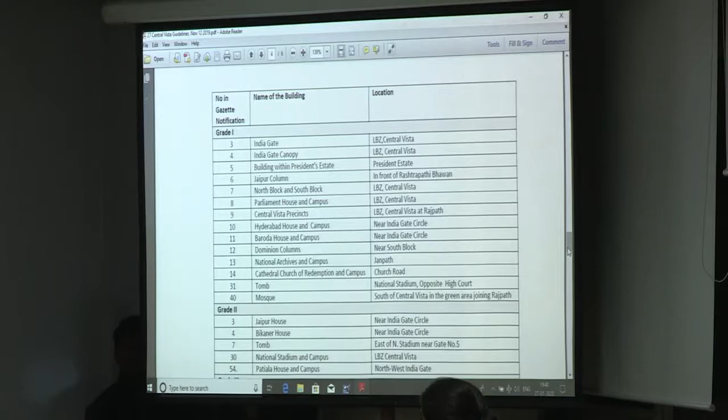There was a plan appended with all the grade 1, grade 2, grade 3 buildings, which also includes the National Museum, National Archives, and the houses.

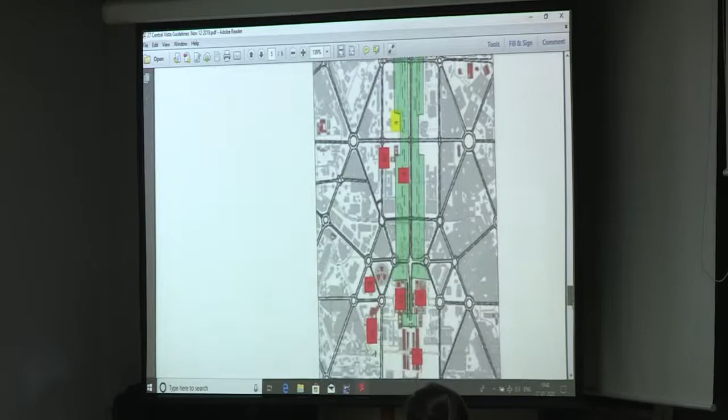They also mentioned the garden city concept and the relationship to the landscape and built fabric, and the synergy between the two.

They mentioned the concepts of planting and how the whole Central Vista has been planned through the concepts of unity, shade, symmetry, hierarchy, integrated design, and the background, which is the ridge, which needs to be retained.

There are trees nearing 100 years old. Some trees are dying, and replacement is necessary.

So these were the broad guidelines that we had shared with you. After that, we had also asked for certain general procedures for development and recommendations for the way forward.

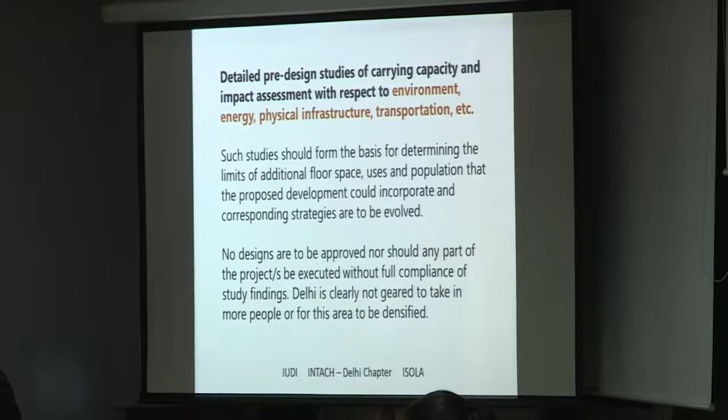The transportation study is underway. As I explain to people often, you can do these studies in two ways. One is, what's the big picture - do we want the central secretariat here? If you want the central secretariat here, it will create some problems. Those problems have to be solved. So your study is more in the form of what are the problems and how are they being solved.

That is how all cities grow. No city in the world does a study of its existing infrastructure and then says, okay, this is a constraint, we can't do anything further. What happens world over - for example, Mumbai, Hong Kong, or New York - they're not like what they were in the 60s. There's far more use now. How did this happen? By putting in more infrastructure.

So instead of saying let's study the present condition and find out what its constraints are, we're saying okay, what is it that we want to do? What's the big picture for this area? What challenges will be created by this? What is the present infrastructure? How do we solve it? It's in that mode that we are functioning at present. Therefore, there is no first stage study saying this is what it is - it's tied in with the study of how the problem is to be solved.

Sure, yeah, we're really glad to know that. And indeed, that will be tied into all the permissions that we need. Okay, and is there an environmental impact assessment done? Yes, that has to be done for the environmental permission that we have to take. Okay, can we go ahead?